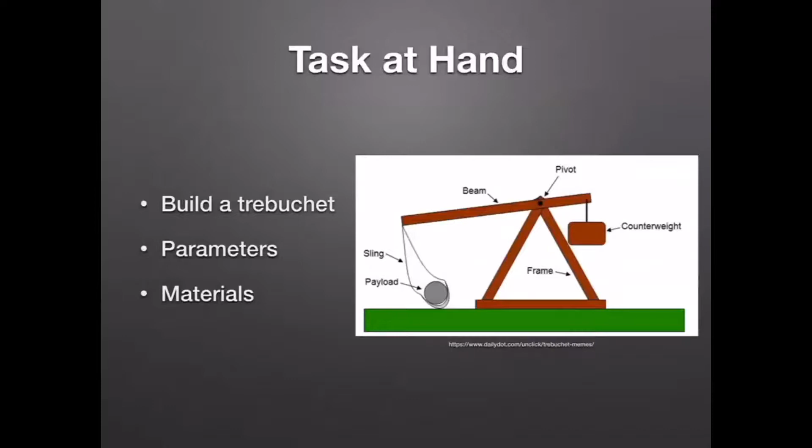Parameters and restrictions: instead of launching large stones, we were instructed to launch a marble instead. Our only source of power could be the counterweight or counterweights that our group decided upon. All of our materials had to be approved by Mr. McHugh. Our trebuchet could be detachable, but all the parts had to fit inside a 1 foot by 1 foot by 1 foot box. Our design had to be built from scratch, and lastly, at least 25% of it had to be laser cut or 3D printed.

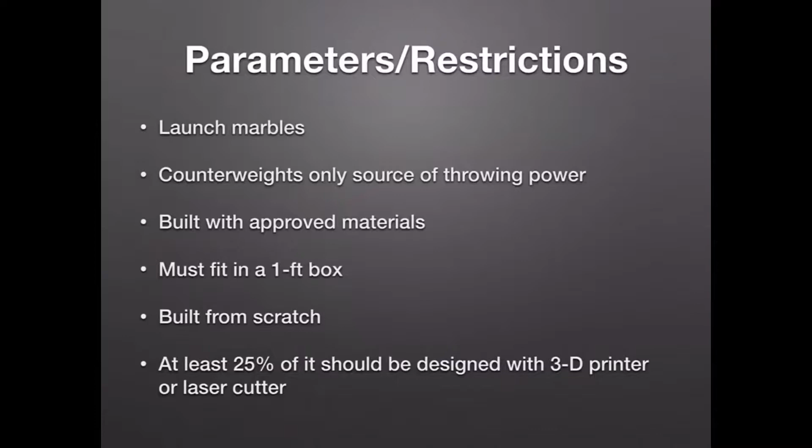Our goal: the entire goal of this project was to make the most efficient trebuchet according to the efficiency equation given to us. To have the most efficient trebuchet possible, we would have to maximize our range and use the least amount of counterweight possible.

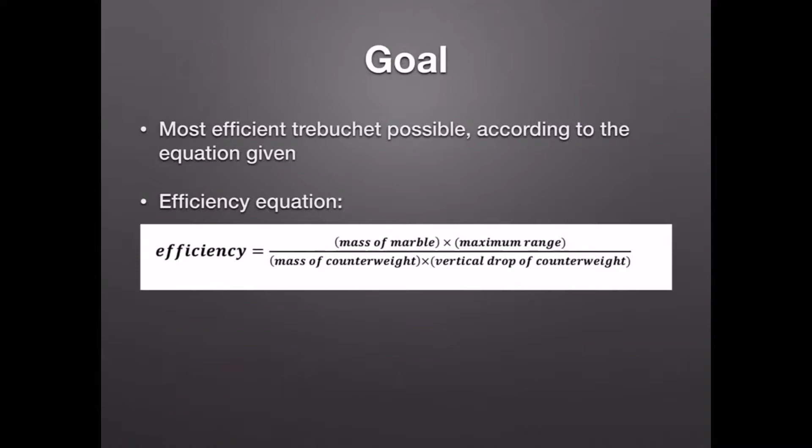So now we move on to the design phase. As Peyton said, the goal was to maximize efficiency according to the formula seen here. What does that actually mean? In short, the goal was to transfer as much gravitational potential energy from the counterweight into the range of the marble. First, the gravitational potential energy gets transferred to kinetic energy, and if you have a really good launch angle, a lot of that kinetic energy will get transferred into range. So there's kind of a two-part process to maximize this efficiency.

Our formula is kind of a blend of the energy efficiency and range efficiency on the simulation. We decided that both of those are very important, so we adjusted the different parts of the simulation to maximize both aspects. I'd also like to point out that our range efficiency was 1.014, which is somehow better than possible - that was kind of interesting.

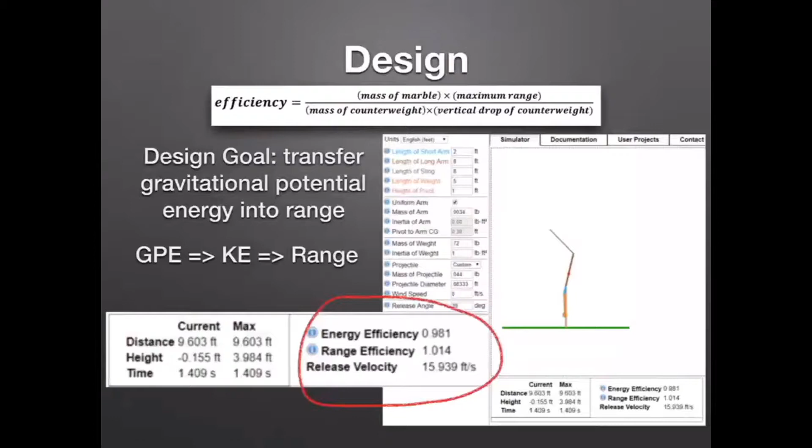Some important results, some findings from the simulation: we decided to use a 4-to-1 arm ratio, which means the long arm is 4 times as long as the short arm. We found that was the ratio to use to maximize both efficiencies.

We also used a very small weight, only about 350 grams. That equates to about 3/4 of a pound. Again, it's not going to go very far - it's not very exciting, but we're going for efficiency, not range.

Here's some pictures of our initial design. We decided to have triangular sides - they'd be simple to construct, we just 3D print them, and they'd also provide some stability.

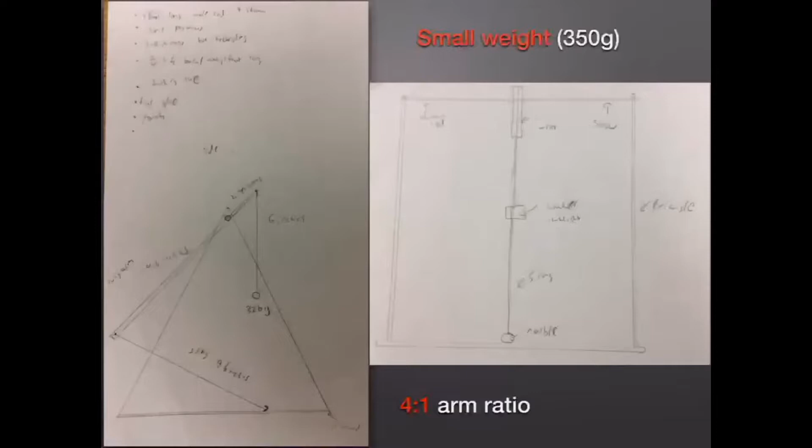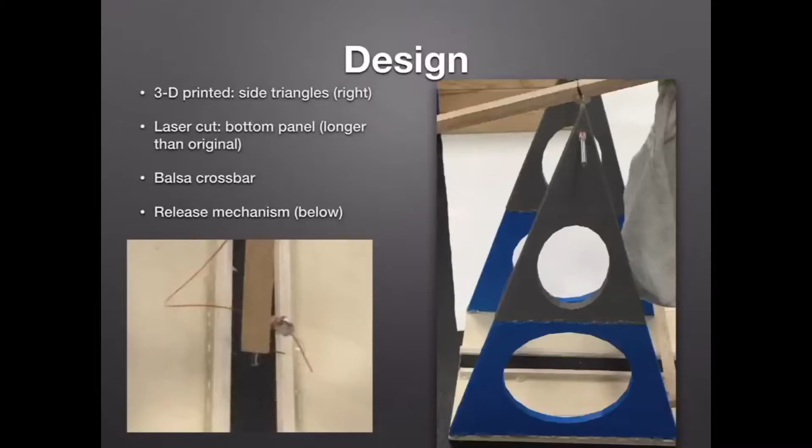We decided to laser cut the bottom panel, and originally we would just have the marble slide along that bottom panel, but as we'll talk about later, we decided to adjust that later in the process. We had a balsa crossbar that you can kind of see in the picture on the right, and we used that to add stability and keep the two side triangles from warping together, bending, or shifting in any way. We also used an eye hook and tack release mechanism as seen in the picture on the left - by bending the tack back and forth, that allows us to easily adjust the release angle. So that's kind of the majority of the major design decisions in the design process.

What went well for us was that our measurements were pretty accurate and precise. Our parts were aligned very well with each other and basically perfect. Our materials were easy to use and to construct.

Our building process was fast, efficient, and had no major problems. Our first step was to use a 3D printer to make the vertical section of our base. This ended up holding up very well. Next, we hot glued the 3D printed parts to a wooden base.

The arm was the next to be built. In total it was 12 inches, the long arm was 9.5 inches, and the short arm was 2.5 inches. This was possibly the simplest part of our construction process. We then added an aluminum rod over the previous parts as our pivot, which was placed under the arm and attached with hot glue.

The pouch for the counterweight was the next piece to be added. We took a piece of cloth and folded it so it held 350 grams efficiently. We then braided fish line to connect the arm to the pouch. We believe this fish line would have a stronger hold and wouldn't have any slack.

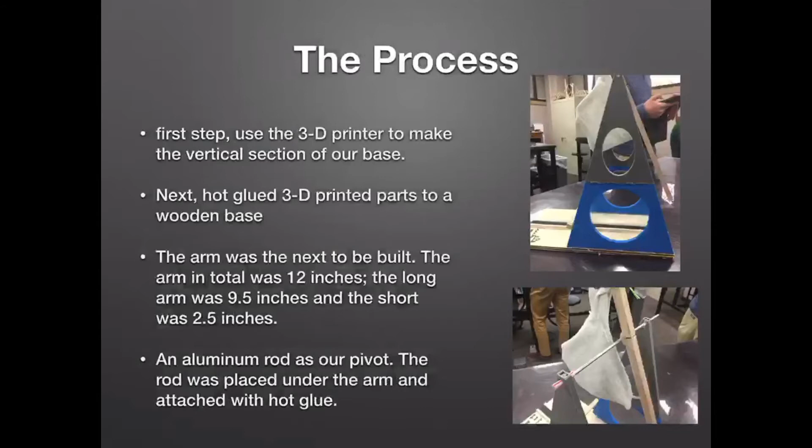The sling was the final piece we put on. We created a small pouch that would hold a marble so it would fly out easily as our projectile. We then used fishing line to connect the pouch to the arm, with a little loop that would come off with a nail at the end, and glued it to an eye screw on the other side. After that, it was basically done.

Our design problems: in our first 3D printing experience, we were making something too big, so it decided to warp on us. We fixed that by putting little circles around the outside of it to protect from warping. We also added a support beam on the front of the 3D base so it would give us more support, and the base wouldn't go side to side.

Underneath, we have a little guide track that we thought helped the marble stay on that straight line as it was moved by the dropping of the mass. In terms of performance, it's pretty simple, pretty much like every other trebuchet. You just pull it back and let it fly.

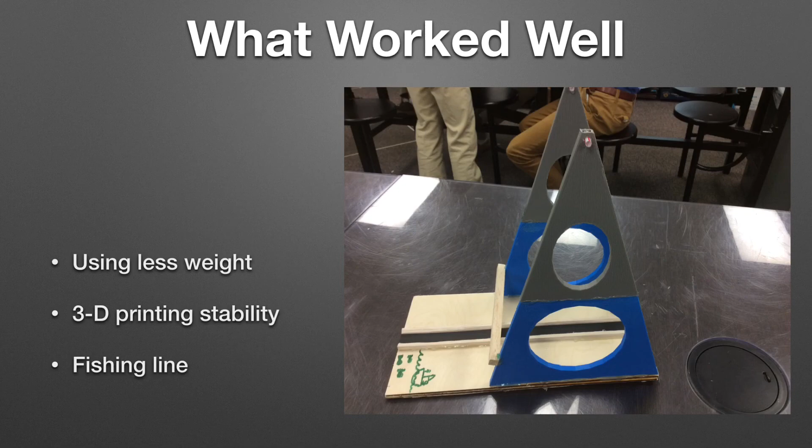What worked well: the fishing line worked pretty well. The 3D printing had some issues with warping, but once we got that worked out, it worked well. Also using less weight, due to the efficiency.

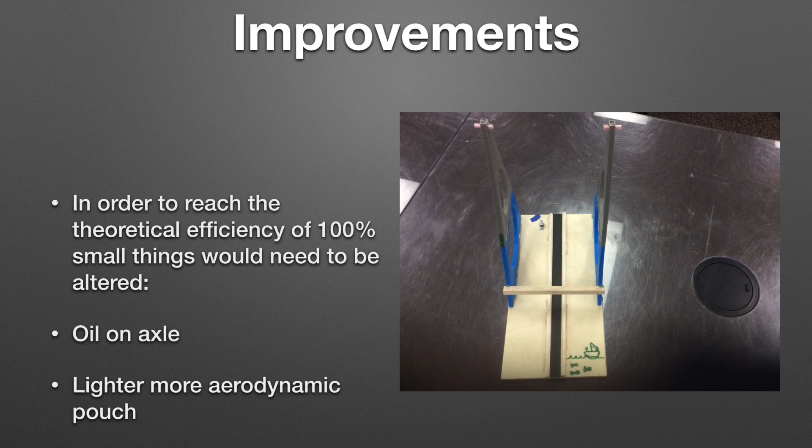What we could have done better: possibly oil on the straws at the very top to cut down on some friction, and maybe a better pouch for aerodynamics.

As for the results, we finished with 79% actual efficiency while we simulated 100%. We didn't expect to get 100%, that's almost impossible to do in person, but we got it 6 feet, which is pretty close to what we wanted.